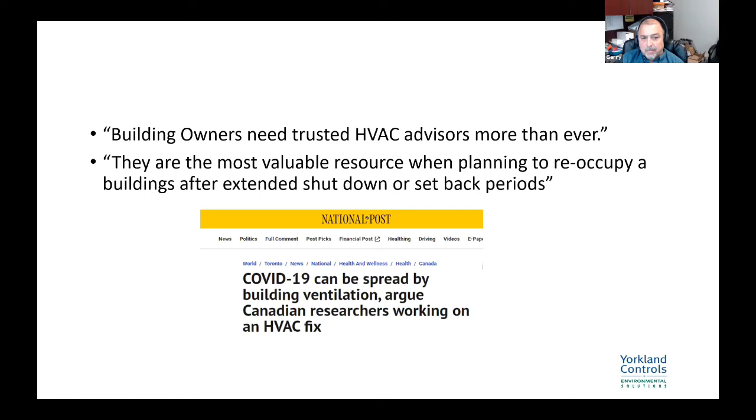So this actual comment was a couple of weeks after COVID, which points to the HVAC and the mechanicals industry as being the most valuable resources when they're looking at a building during a pandemic mode in its operation, pre and post. So if you go next, I've just looked at some of the other sessions that we ran, and we keep updating this guide specification or this working white paper that's on our website. So if you go to yorkland.net, it's on our homepage, you could download this thing. What we did at the beginning of COVID and have continually updated, and what I have in front of me is some recent information from as late as September the 11th of this month.

If you look at what the governing bodies, that's ASHRAE, World Health Organization, CDC, Public Health Ontario, reference a couple of things related to operating the building and how to mitigate the risk of the spread of the virus or infectious diseases, where the virus is on these respiratory droplets. So the themes that all these governing bodies group them into are really 4 categories: ventilation, air changes, how do we increase ventilation; pressurization, validating and controlling based on negative pressure; humidity, as some other ORAC webinars have communicated, humidity between 40 to 60% actually retards the growth of the virus. And of course, filtering, a lot of talk about filtering and how you could use HEPA filters.

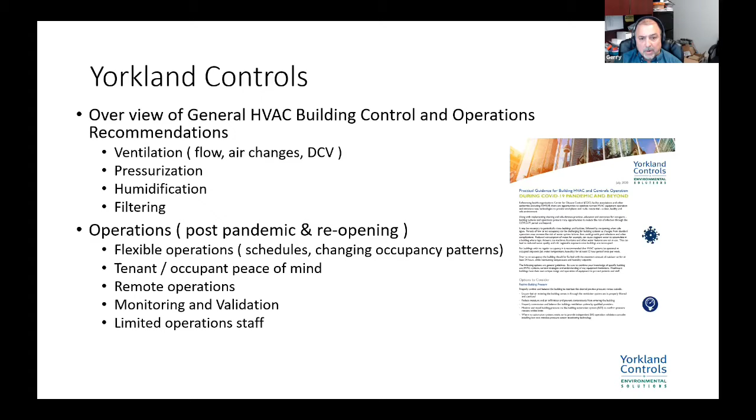A lot of uptake on monitoring validation, again, not only for the landlords, because they're trying to mitigate their risk, but also for the tenants that are in there. All of us are kind of working remotely or with limited operation staff. That may also apply to the HVAC ORAC members, where they may not be up to staff, and the people that are working harder to do the work in reactive mode, and hopefully trying to offer some of these ventilation and mitigating features that we're seeing today back into their customer base. Next.

This came out September 11th from CDC. Again, referencing HVAC, referencing ASHRAE, that talks about how to manage a building in pre, post, and during pandemic mode. And if you want some resources, go to the CDC, just type in HVAC, and you'll get that. It was published September 11th. Good resource. Not much has changed. A lot of it is still relevant.

There's still a lot of studies going on with respect to ventilation and HVAC, and where these droplets end up going. A couple of researchers in Alberta are focusing on what's going on in the restaurant environment, where they're even looking at the laminar flow. People that are sitting closer to the discharge air vents seem to have contracted the virus, while those that are within 8 feet apart haven't. So that feeds into all this community documentation that we're continually updating. Next.

So when it comes to controls, actually let me step back, because I'm just looking at a document here from the Ontario College of Dentistry just this morning. They published September 11th. And I'm focusing on dentists because I think it applies to what we're trying to do today, which is look at the business use space for a dentist office, right? They tend to be different square footage, tend to be smaller. They're not in heavy duty or high commercial building occupancy spaces. And they talk about when they're with a patient and they're cleaning the teeth, okay?

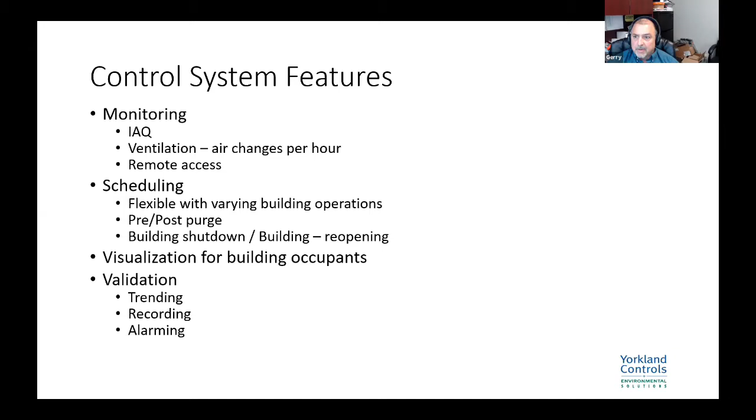So Scott, I'll turn it over to you. Thank you. Thanks, Gerry.

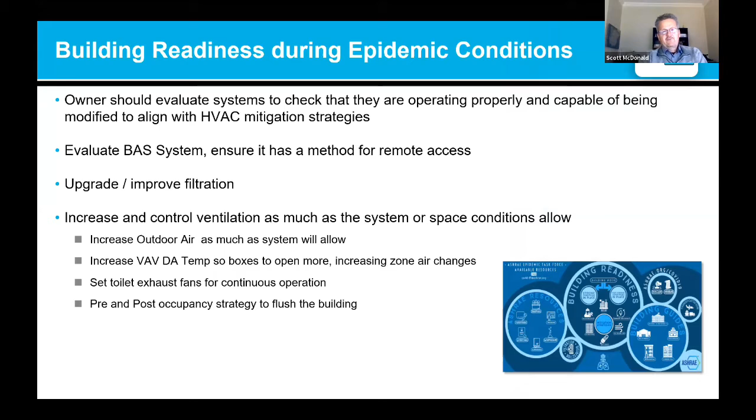So you did a great job of talking about both from a global, countrywide, province-wide, even municipal, talking about what's available. There is great information on this at ASHRAE.org. And I did put some notes in here on that, but really, Gerry, you've pretty much covered it off. I think filtration, evaluating your system to make sure it has remote access, flush out mode, check your BAS alarms, make sure they're notifying the right people. Consider updating your BAS programming to support future things like epidemic mode.

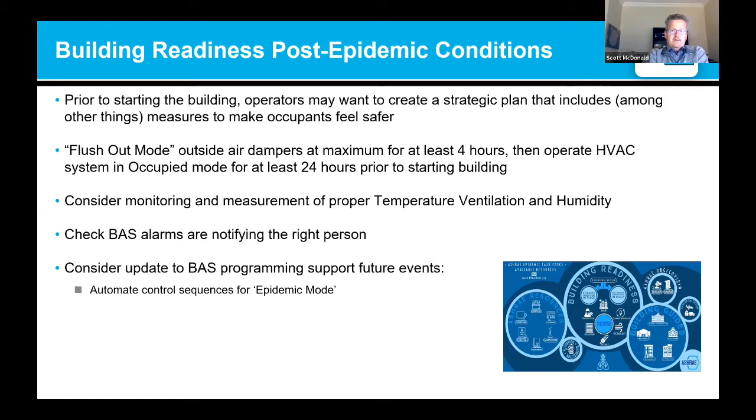And that one, the point at the top there, I think you kind of stressed that too. We need to make occupants feel safer. It's a big deal, right? People need to feel safe where they work, or they aren't going to come to work, or they're not going to be productive at work. So, the 4 key points here: remote access, increased and better controlled ventilation, better control of humidity, upgraded filtration. Those are kind of the 4 key points that the ASHRAE website stresses.

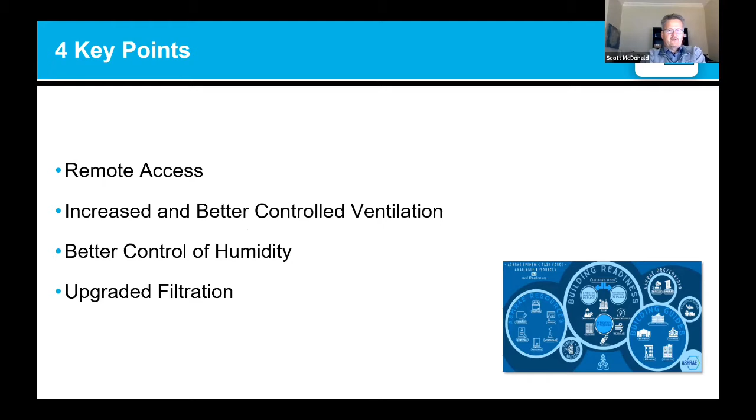So what can we do about that? So Johnson Controls came out with a product called Verasys, I think about 3.5 years ago. And it kind of fits into this market, this light commercial or mid-market HVAC market. So this is how Johnson Controls sees that market in North America. 60% of the buildings out there are very well served by full-blown building automation systems like Facility Explorer, like Metasys, that sort of thing. These are systems that can really do anything. But there's about 40% of buildings out there that are really underserved. Those full-blown automation systems would typically be overkill for many of these buildings.

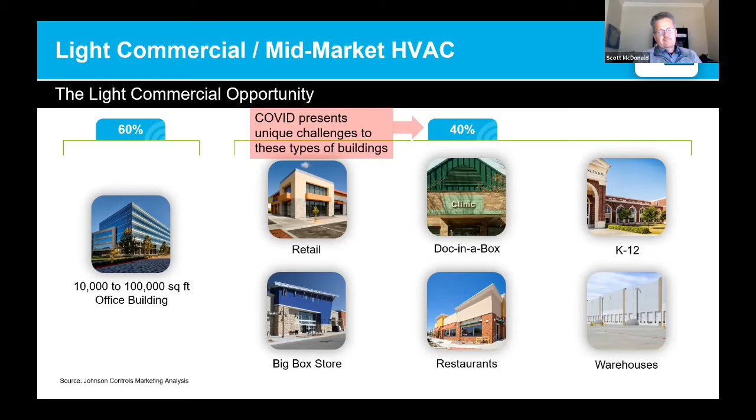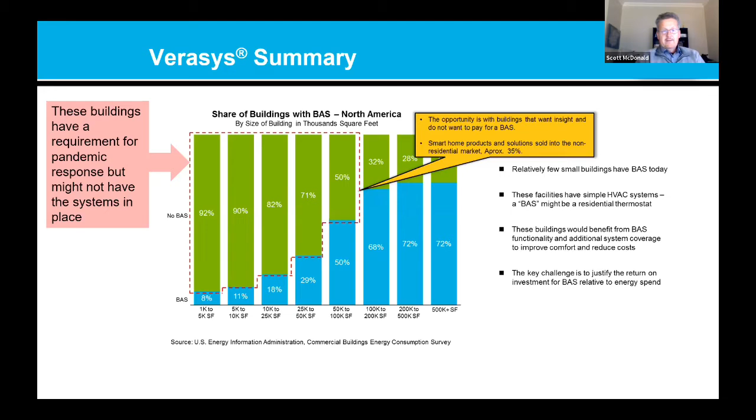So, COVID presents a pretty unique challenge to these buildings because typically they don't have BAS systems. So this slide basically says this is the share of buildings with building automation in North America. Along the bottom, it's the square footage of the building, and green means they don't really have a BAS system. So there's a pretty big opportunity, you might even say a pretty big hole in that market that may need better control. These buildings have a requirement for a pandemic response, but they might not have the right systems in place.

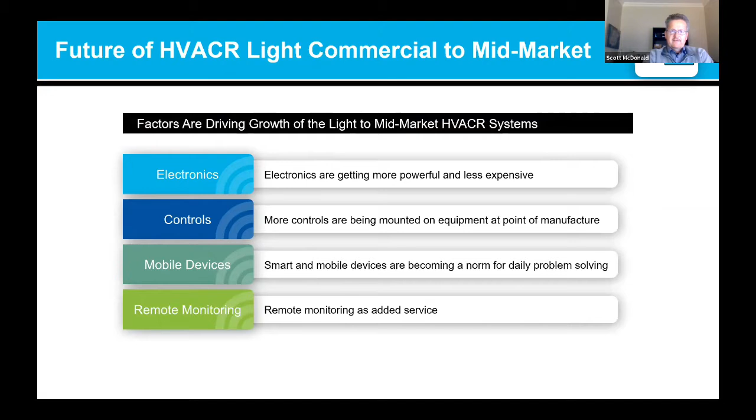So what's driving this light commercial market? Electronics are getting more powerful and less expensive. Controls are being mounted on equipment at point of manufacture. Everybody has a mobile device now and uses it for daily problem solving. And this idea of remote monitoring, even before the pandemic, has become pretty important. People want to see what's going on in their facility. So these are pretty important factors here.

So with Verasys, it's a building automation system where intelligent default values are put into it. We're talking about configuration. We're not talking about programming. Because of that, you don't need to be a programmer. You don't have to have software. You don't have to have cables to connect into the system. There's really no control vendor installation labor required. You don't need to be a controls contractor to do this. This product is really well suited for the commercial mechanical contractor that doesn't typically have a controls line. It's a really good fit for this type of company, and that's where we sell most of this product.

We've also built in things like fault detection and diagnostics, and of course, remote connectivity into it. Again, those things are important. But I think key here is that really this is not a controls contractor product, and when we show this product to real controls contractors, they tend to not like it because it kind of cuts into what these guys are already doing.

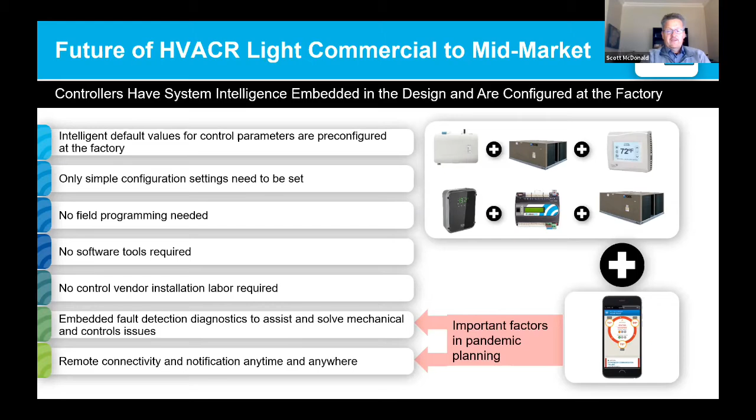So what is Verasys? What can we do with it? Constant volume equipment, so it controls rooftop units, VAV systems, VVT or changeover bypass. So really any type of commercial zoning we can do with Verasys. Works great with York stuff, but we probably install more of this on other people's product than we do on York stuff. Use your smartphone to configure it, so you're not dealing with software, you're not dealing with your guys having to have laptops, you're not having to deal with the guy on call not having the tools to go out and investigate a problem where one of these is put in. We're basically using your smartphone, everybody's got one.

And I don't like the term plug and play, but it really is a plug and play system. If you wire it up and you tell it it's going to be a changeover bypass or VVT system, when you power it up, that's what it's going to be. It's going to be a VVT system. Your installers or your field technicians then need to enter the parameters to make it function effectively, but really there's no real programming involved with this system. It's not your typical BAS.

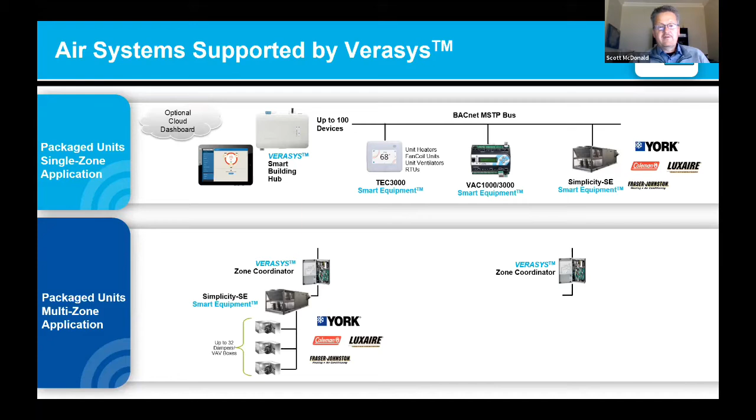If we were doing multi-zone applications, we can do that either with York products or third-party products. And generally speaking, we've done a lot more of the third-party products as zoned systems. We do a lot of those. So we can have up to 10 zoned rooftop units. Each one of those rooftop units can have up to 32 damper or VAV boxes. So again, I talk about this being for light commercial or small buildings, but really we could do a pretty big project with Verasys, and it really does a good job of mitigating risk.

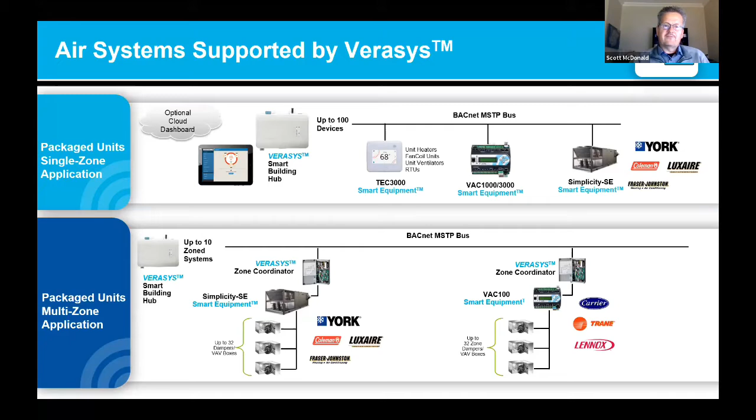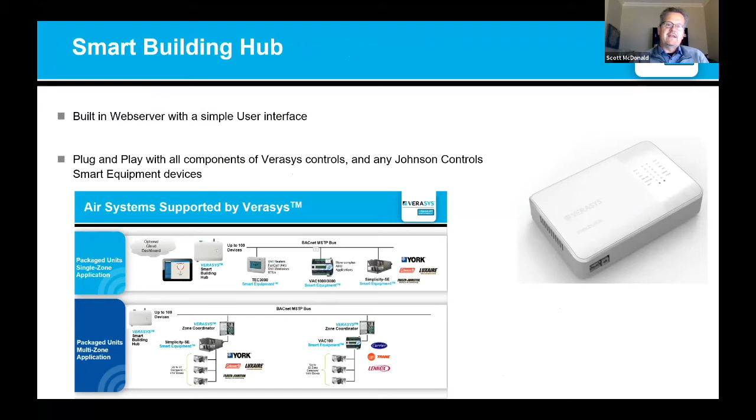So that Smart Building Hub built-in web server allows you or your field technicians or the end user to log into it and use a PC, a tablet, or phone to get into the system. It's built around HTML5, which means the graphics that you see on your phone will be very similar to the graphics you see on your PC. And then you've got this Ethernet port, so you can plug this into your customer's network if you need to.

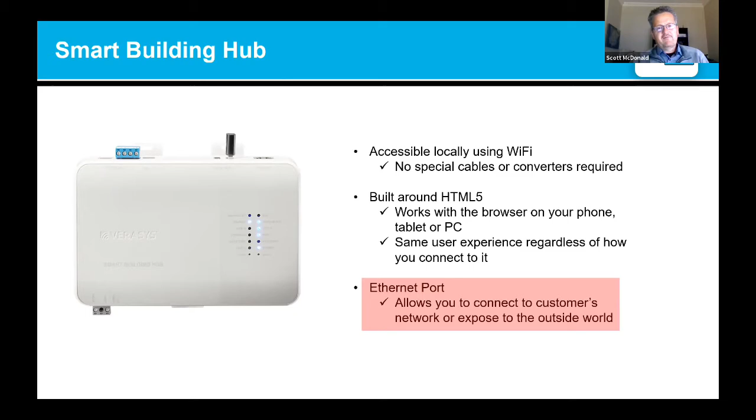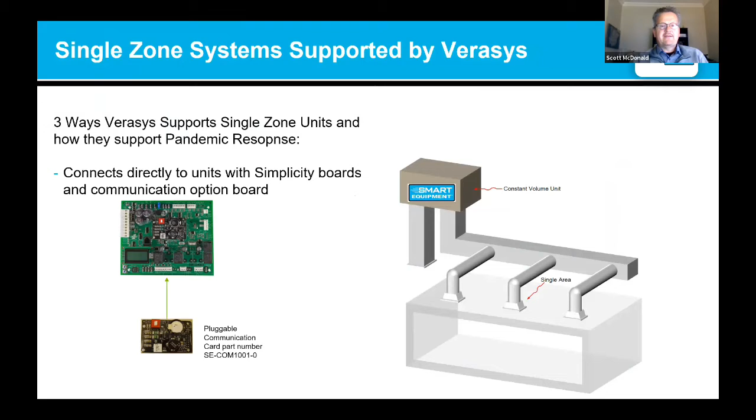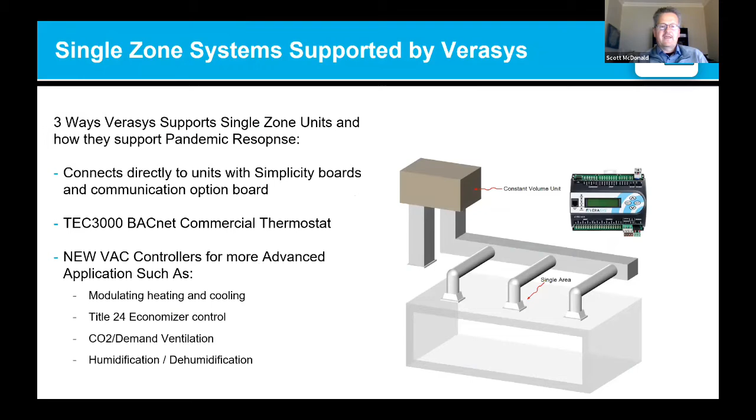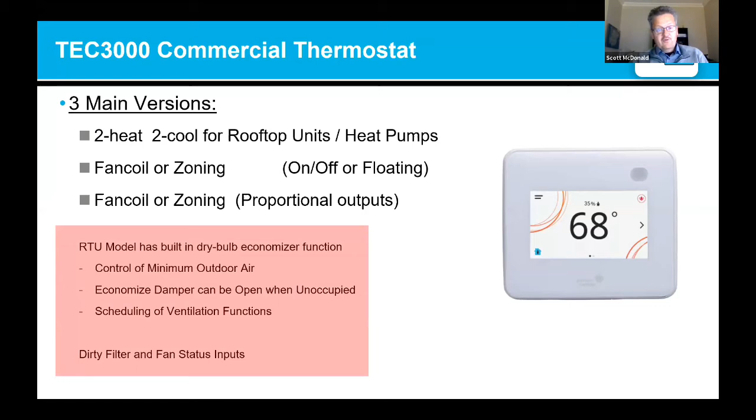So, talking about these systems and how this relates to pandemic response. So we've got our York unit with the Simplicity board, or we've got a thermostat, or we have this application controller that does things like modulating heating and cooling, Title 24 economizer, demand ventilation, humidification, dehumidification control. So this TEC3000 thermostat is able to control the outdoor air damper. So that's a feature for that pandemic function.

We're coming out with a patch for this thermostat in the next couple of weeks that really addresses the pandemic response. So it's adding some demand ventilation functions to the thermostat, but I think this thing is really pretty valuable, and it'll allow you to set up a pandemic response ventilation, which means we're going to purge the air at least 2 hours, adjustable to higher, before the building becomes occupied.

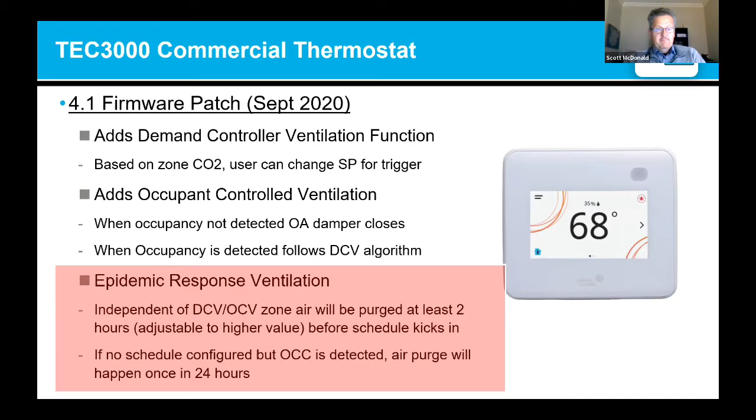If no schedule is configured but occupancy is detected, air purge will happen once in 24 hours. So it's really a good way to ensure that requirement for ventilation in the building. We also have a wireless version of this. If you look at our smart equipment, our York systems, they're able to control fresh air, fan control, filter control as part of that pandemic preparedness.

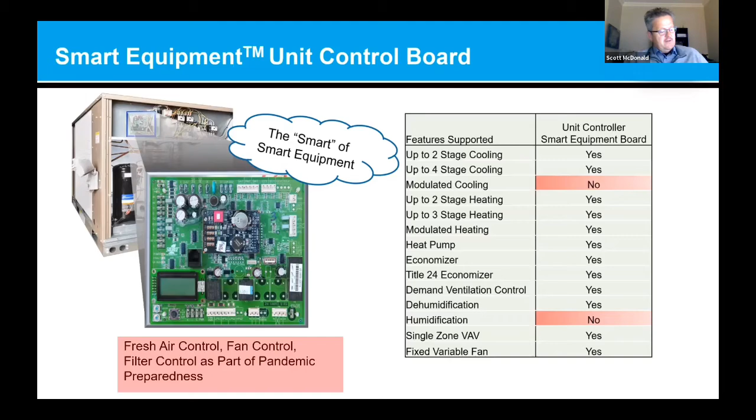And that application controller is able to do humidity control, fan control, filters, set point monitoring, fresh air control, all kinds of different things for that.

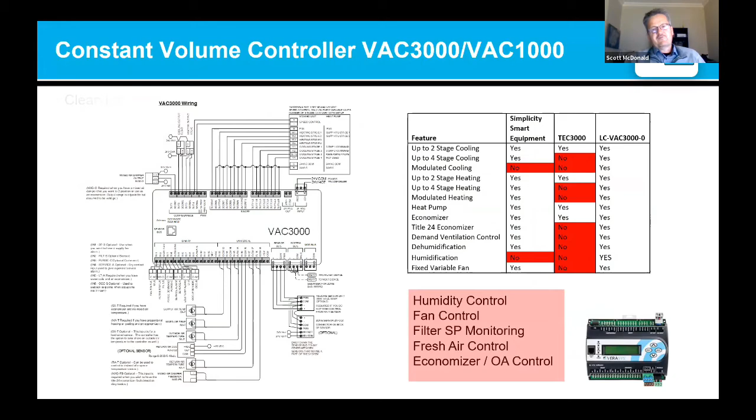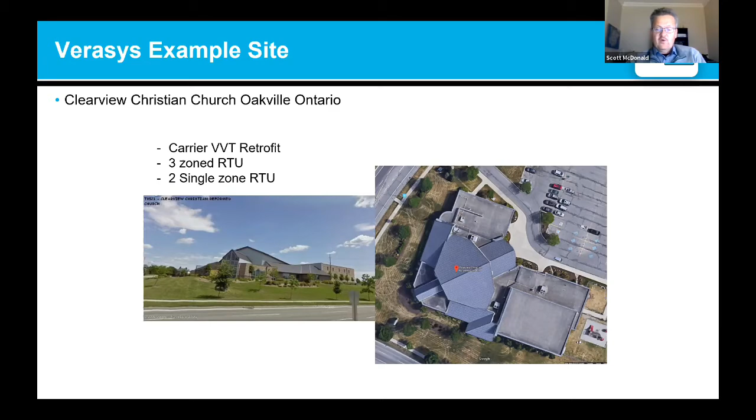I'll just ask maybe Jerry, how am I sounding? Can you folks hear me? Yes, Scott. We're good? Yeah, we're good.

Here is the site. So basically, this is what the end user sees when they log into it. We're kind of away from the cutaway of the duct with the spinning fan wheel and loads of data. What we really have here is the building broken down by areas served. So offices or a wing of a building, and the owner or the end user of the building basically gets a really good snapshot of what's going on in their facility. They can see what's calling for heat, what's calling for cooling, what's satisfied, what zone is occupied or unoccupied.

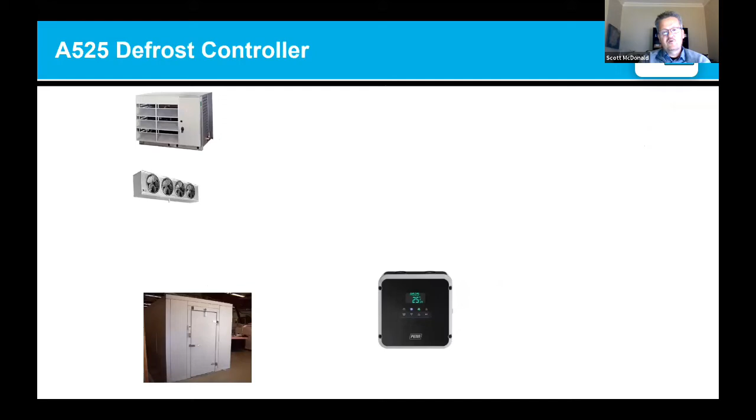All right. Okay, so what else can we do with Verasys? So one of the things we can do is refrigeration. So through our PENN division, we have an A525 defrost controller that we can tie into Verasys and control our refrigeration system. So typical box, refrigeration box cooler where we've got loads of features. We can really control any type of system with this, including modulating fan, evaporator control.

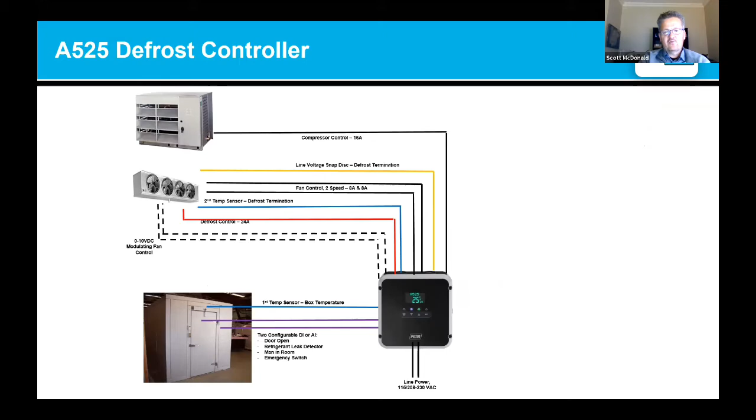Got some inputs and outputs to make it so you can alarm if the door is left open, or an emergency switch or a refrigerant leak detector we can tie in here. This defrost controller will then tie into the Verasys system. So looking at things like this Internet of Things for convenience stores, right? So you've got maybe a quick service restaurant or a convenience store where you've got some HVAC, you've got some refrigeration, you're tying it into Verasys.

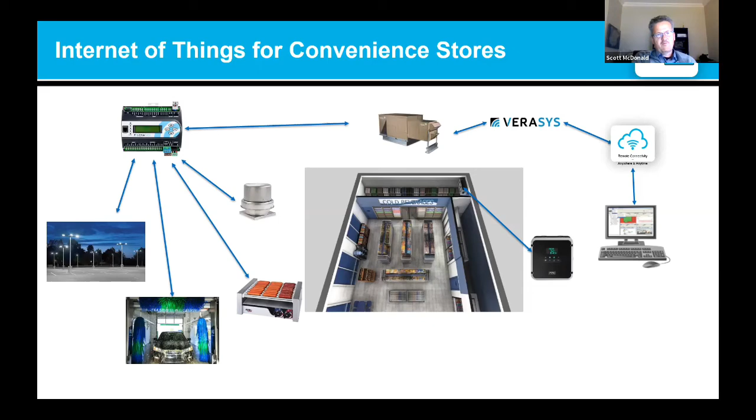Maybe you want to control some other things in the building. You've got this, call it the I/O module, that'll let you do maybe other things in the building like ventilation, or maybe turn the hot dog cooker off at night, that sort of thing we can do with this I/O module, which is really a pretty powerful tool. So back to the pandemic here, we talked about scheduling, monitoring, trending, and alarming, making sure the building is safe. This is a really good tool for that. So this does that for analog and binary inputs. It also has outputs that you can set up to control other pieces of equipment in the building.

So in that church I showed you folks, they had large exhaust fans they wanted to control. So we were able to put those exhaust fans on a schedule using this controller, but also give the ladies in the office of the church a button they can push to give them 2 hours of ventilation. For example, maybe there's a funeral or an event that's not built into the schedule, makes it really easy for them to operate their building that way. They can just push that button, the ventilation comes on for a predetermined amount of time.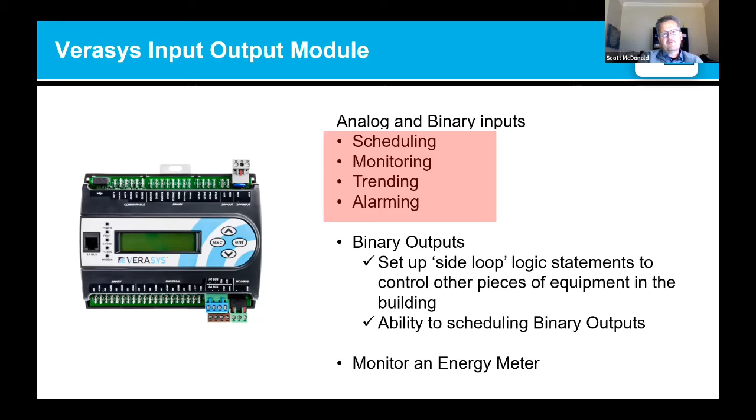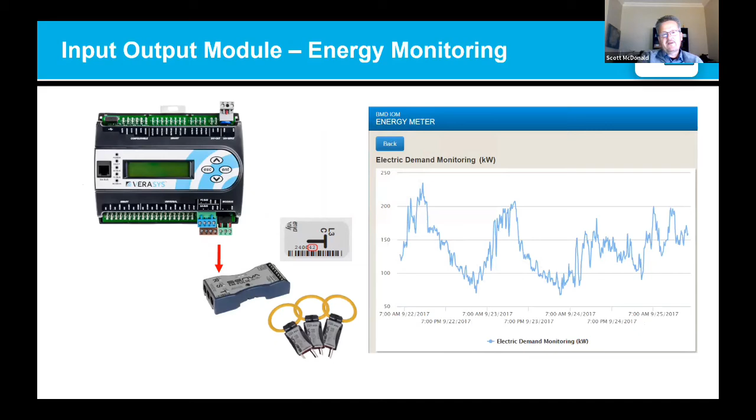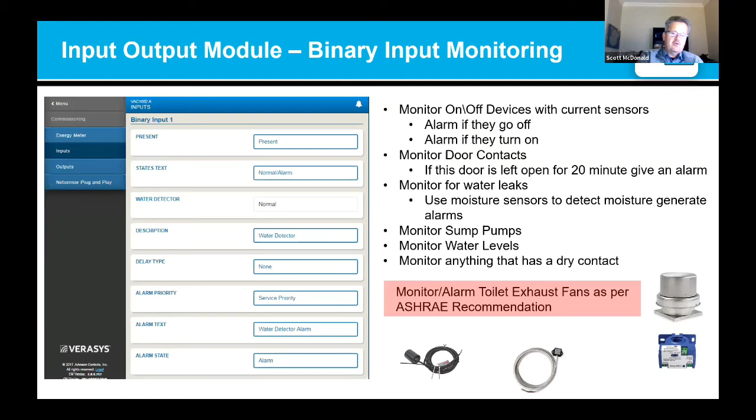We can also monitor an energy meter with this. So it's very low cost. We can have up to 3 energy meters that can look at a piece of equipment or the whole building. So we can do that with this. We can monitor binary inputs. So just as an example, toilet exhaust fans, as per the ASHRAE recommendation. You should be monitoring them. You should be making sure they're actually working. You could do that very easily with this system. You can monitor temperature, humidity, carbon dioxide, building pressure. All of these things are things that work really well with this I/O module.

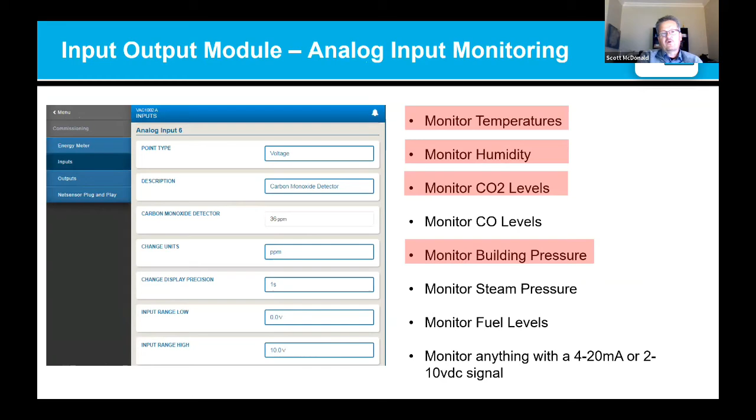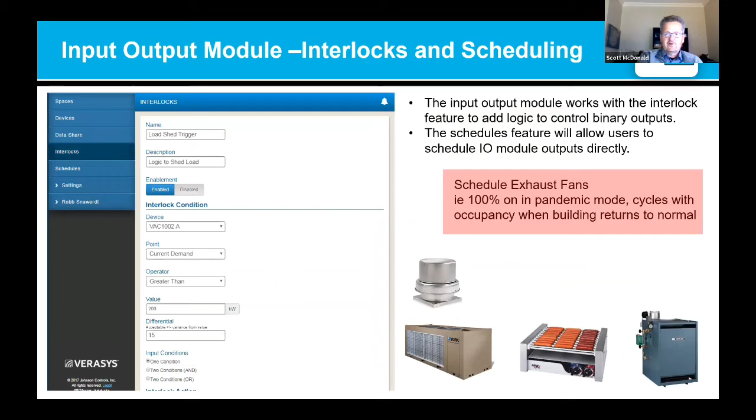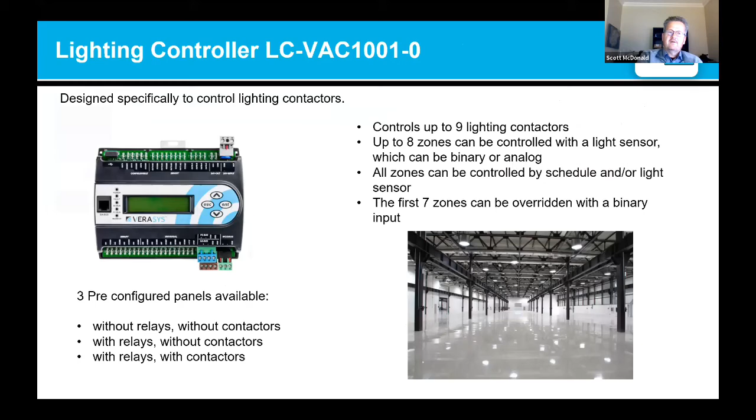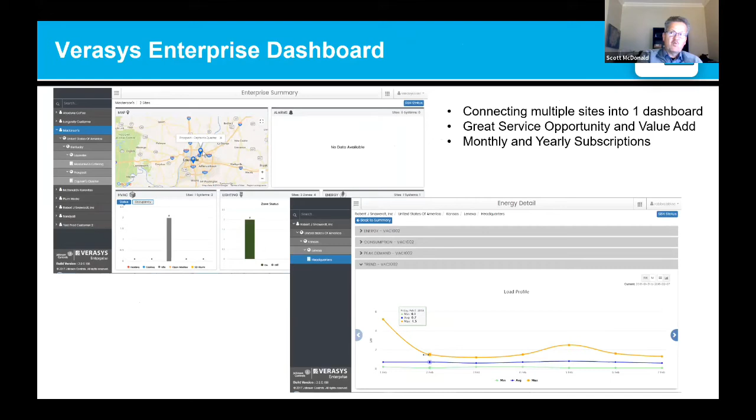And then we can add a schedule to it, like they did in the church. You could schedule the exhaust fans, for example, 100% on in pandemic mode. They cycle with occupancy when the building returns to normal. These are all things you can do with Verasys. You could do them remotely if you needed to. We can also do lighting control with Verasys. And if we have multiple buildings, we can pull Verasys into what we call an enterprise system, an enterprise dashboard that allows you to control multiple buildings from one sign-in screen. So that dashboard is available too.

So lots of good things with Verasys. We do zoning. We've got that pandemic update for the thermostats. We can do wireless thermostats, refrigeration, and lighting. Pretty excited about the next version of this, which is coming out next month, which is 4.0. So that gives us that pandemic patch for the thermostat. We've also got a side loop controller that lets us do more advanced control. So let's say we wanted to do outdoor reset on a boiler or on a valve or multiple valves, or do staging of equipment, or really any type of more powerful control. We're going to have a side loop controller. This thing is actually great.

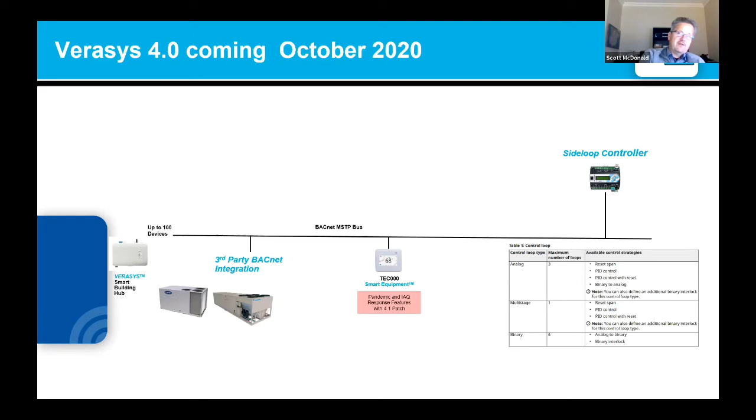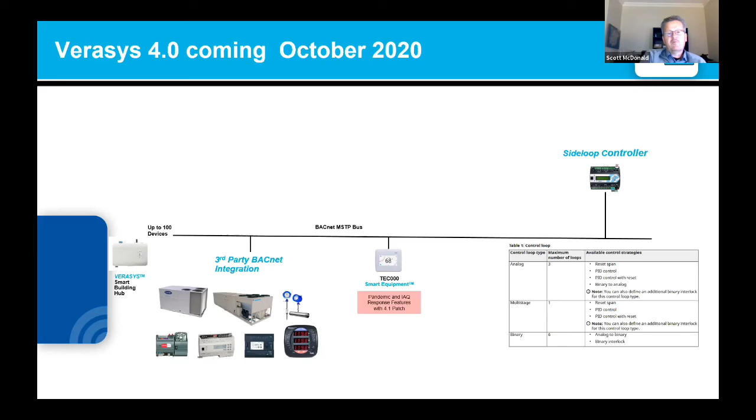So I get asked a lot, will this work with anybody else's equipment? And about a month ago, if you would have asked me, I would say, nope, it only works with Verasys equipment. But we're going to release the ability to do third-party BACnet control. So if you had a rooftop unit that had a BACnet card on it by another manufacturer, we'll be able to pull that into Verasys. If you have other companies' building automation controllers that are BACnet, we can pull those into Verasys. If you have energy meters, water meters, any other type of meter in a building that's BACnet, we can pull that into Verasys now. And finally, there's this BACnet IP support.

So if you had Verasys in one portion of a building that also had a BACnet IP supervisory controller in it, you'd now be able to pull that Verasys controller into the larger BACnet IP supervisory controller in the building. So again, we kind of started off small with Verasys, but it seems like every year we're adding more to it that make it more valuable and useful in these commercial building applications.

So just to wrap up here, Yorkland and Johnson are now hosting limited hands-on training for Verasys. I actually did one yesterday for two guys. We can do up to three students total. Yorkland has a branch in Hamilton that's really well suited for this type of training because it's a separate facility to the main branch. And Jerry, I think you've done a good job setting up that branch to be safe. There's plexiglass partitions for the students.

Typically we do it in half a day, so we're not having lunch typically with these, but they cover the basics up to configuring a changeover bypass controller. It gets the guys started. This would get the guys feeling comfortable with Verasys.